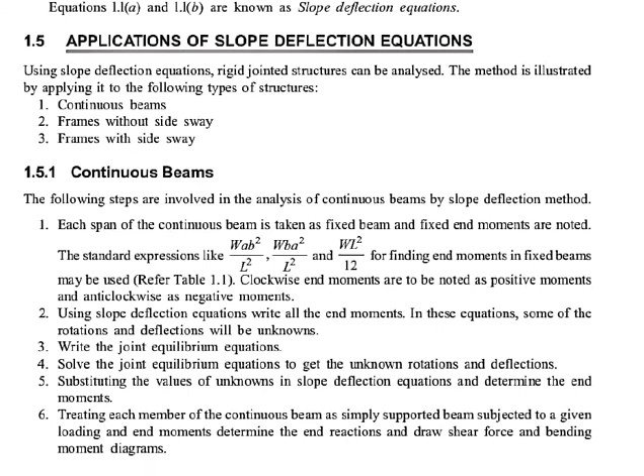So similarly we had this equation also. MBA is equal to MFBA plus 2EI by L into theta A plus 2 theta B minus 3 delta by L. So using these equations we can analyze structures like continuous beams, frames without sway and frames with sway. So before moving to the problems using the analysis by slope deflection method, we have to know the

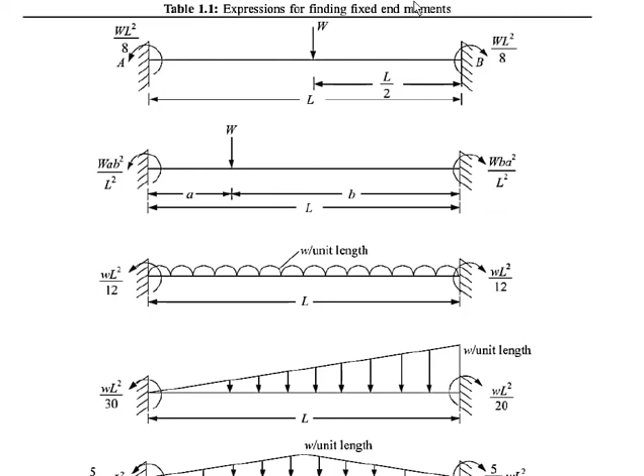So these are the expressions for fixed end moments. Before that, just read this. Each span of the continuous beam is taken as a fixed beam and fixed end moments are noted. Standard expressions can be used. And a very important one: clockwise end moments are to be noted as positive moments and anti-clockwise as negative moments.

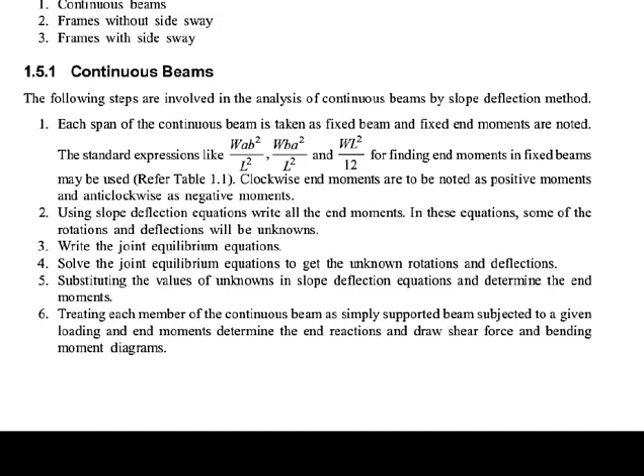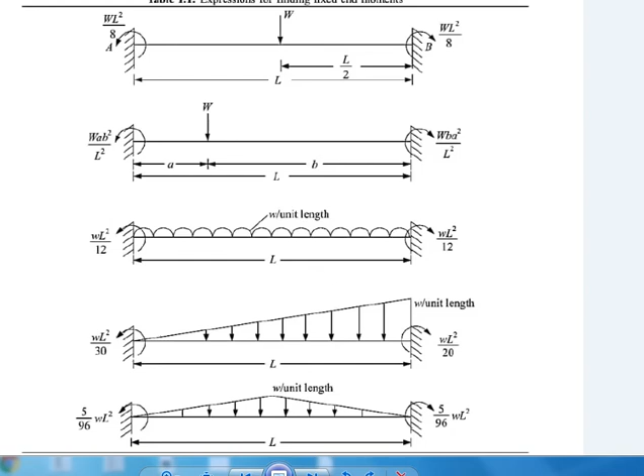So these are the standard expressions for the fixed end moments. Here you can see that in the first case, it's a fixed end beam with a point load at the midspan of the beam. In this case, the fixed end moment at A is anti-clockwise, so it is negative, and the value is WL by 8. That means MFAB is minus WL by 8 and MFBA is WL by 8. So these are the standard expressions.

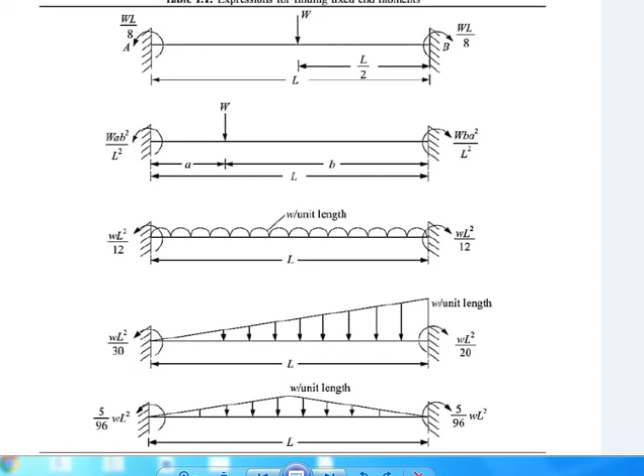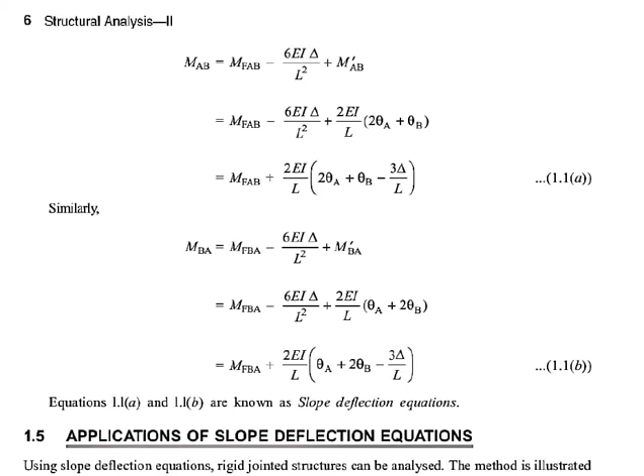So just remember these cases, the standard expressions for fixed end moments. These values are to be substituted in the slope deflection equation for the fixed end moment values. So that is about the calculation of fixed end moments before we move to the problems using the slope deflection method.